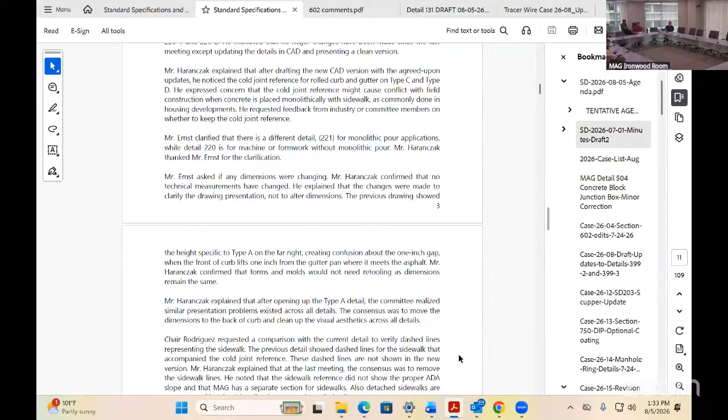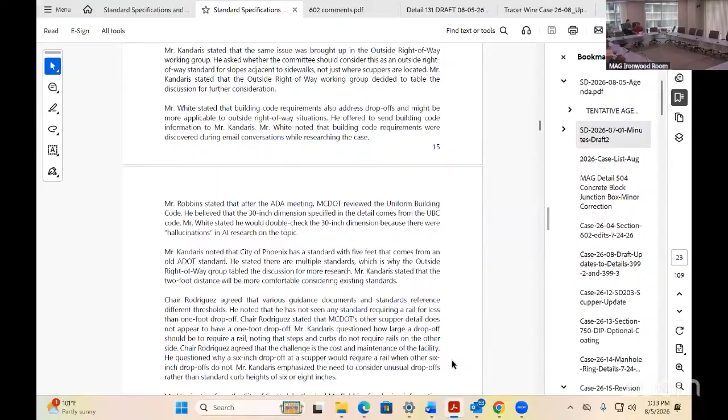As Gordon is panning through the minutes on the screen, does anybody have a comment that they had caught beforehand? Or does anybody have any corrections or any additional notes that we need to mark into the minutes? If not, I'll entertain a motion to approve. Mr. Chair, I'll motion to approve the meeting minutes as written. All right, thank you, Mr. Haranczak. Is there a second? This is Warren. I'll second. Thank you, Warren.

Okay, this is a roll call for the July 1st, 2026 minutes. ADOT, yes. Avondale, Buckeye. Was that a yes? No, I was asking Jim if he's there. Buckeye, yes, thank you. Chandler, yes. El Mirage, yes. Gilbert, yes. Glendale, yes. Goodyear, Maricopa County, yes. Mesa, yes.

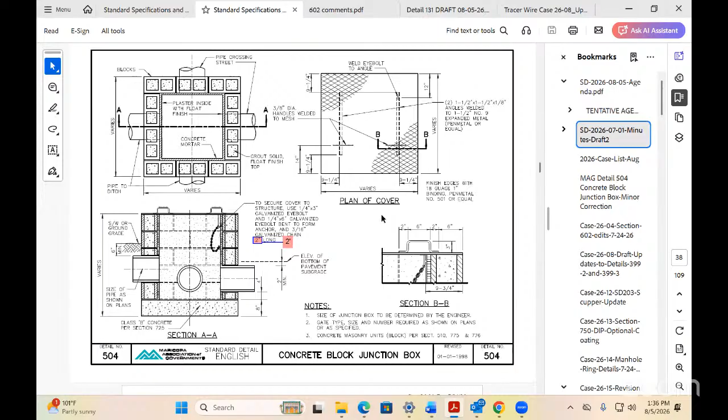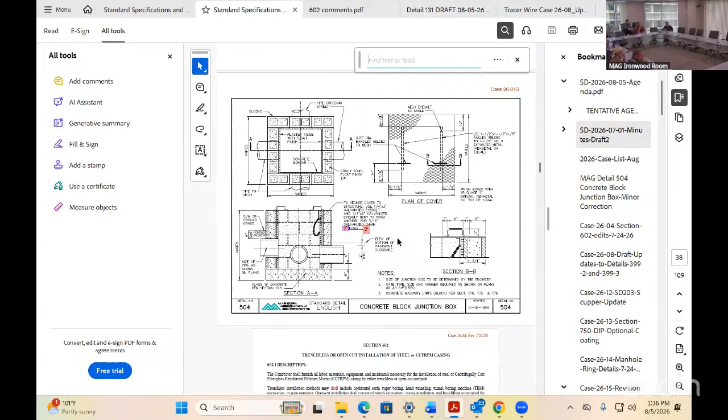Case number 2601, miscellaneous corrections. I don't believe there are any new corrections, actually, or there was one that was brought in at the last minute. So do you want to go over that? Yeah, this one was from, I believe, MCDOT. And it was just changing a typo from a 2-inch long chain to a 2-foot long chain on detail 504. You mind zooming in real quick? That's the lower right. There you go.

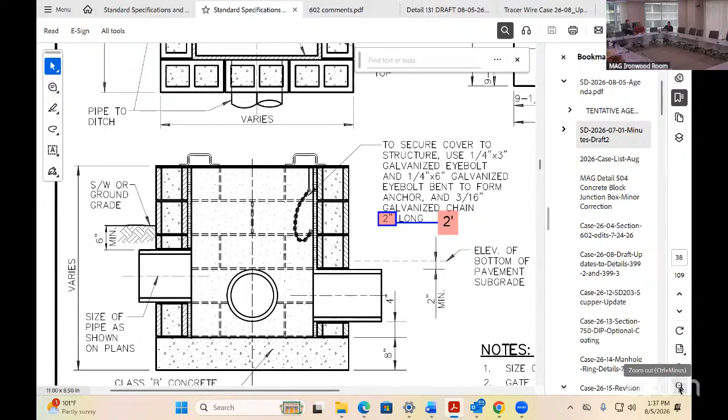Yeah, that's definitely a misprint, Mr. Chair, to have a 2-inch long chain there. I am surprised that it hasn't been brought up. Yeah, good catch on MCDOT's part. Definitely meets the blooper requirements. Yep. Anybody have any other comment on this? If not, it seems like everybody's saying it's a very straightforward change. All right. Does anybody else have a last minute correction to add to this month's meeting?

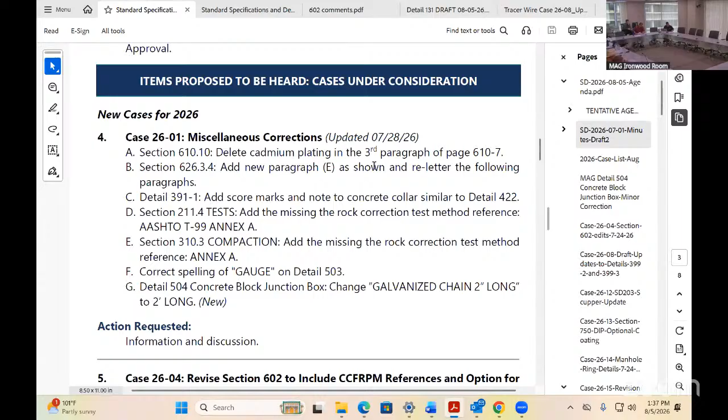No? All right, then we'll move on to the next case, 2604, revision to section 602. Arvid, would you be able to give us an update on this case? I don't know if Arvid was on yet. Mr. Chair, if Arvid's not on, I can provide an update. Thank you, Gene. So based on the last meeting's discussions, the committee members wanted me to go through and look at shall and may. That was Peter's suggestion, great suggestion, Peter. I went through and did some scratch outs and supplied this to be posted for everybody to review.

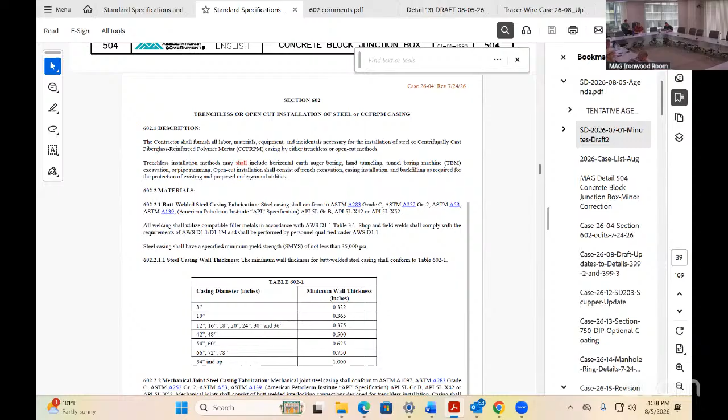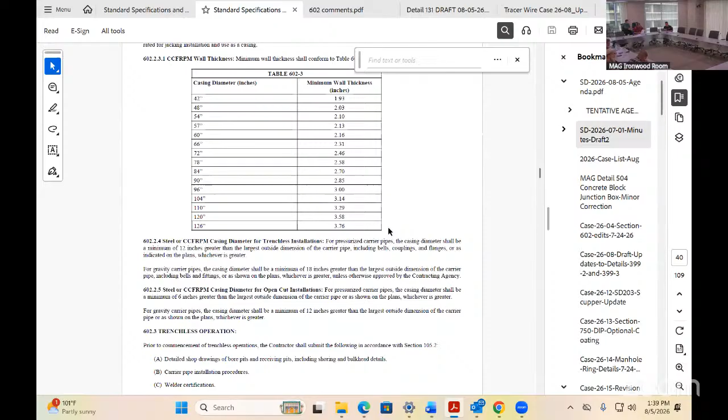I still encourage everybody to review it, but since then, today I received comments from City of Phoenix, MAG Chair Jose, regarding some numbering and pointing out a few other items that need to be looked at. So Arvid and I are going to need a little more time to go through Phoenix's comments, which I greatly appreciate. And also, I realize I have not checked all the ASTMs to verify that they are correct and the links are still there. That's another action item for me. That's all I have, Mr. Chair, if you want to open it up to the committee.

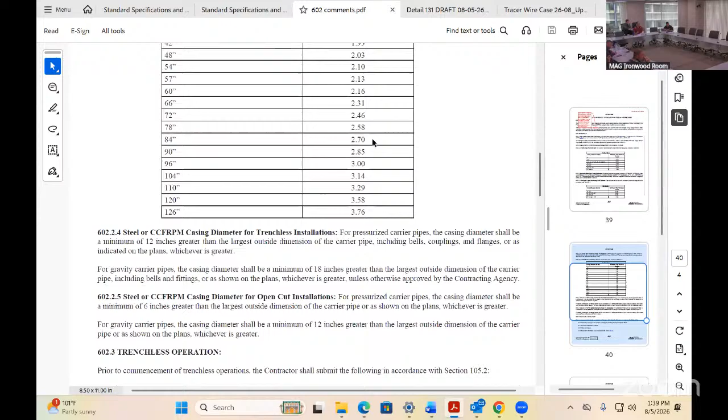Yeah, just for the group's benefit, most of the comments that were made were more on formatting and layout of the specifications. There wasn't really any change to the language that's being used. I think Gene and Arvid have been putting a lot of work into this and it's clean. I think it's just mainly final touches. Has anybody else had a chance to review that, or is there a pending question to ask of Gene since he's been heavily involved in it? Yeah, thank you, Mr. Chair.

If not, what are your feelings, Gene? Since Arvid is not here, is there a way to potentially flush most of the outstanding comments by the next working group, and maybe consider the case for action next? Yeah, I can commit to that. I'll get the revisions.

I'll look through these and make any changes I think are applicable. I'll get a clean-looking version through the working group and get it in front of everybody. I'd like to see it up for action at the next meeting. I need to connect with Arvid because he's got to put eyes on it as well, but I think we can make all that happen.

All right, Mr. Chairman, the next meeting is our last meeting for the year, isn't it? No, I think September is our last meeting for the year, with a potential option for October, correct? Yes, that's correct. Generally, we try to finish in September. Okay, so the hope is we can get everything ready to go by next meeting. Correct, hopefully we're presenting final drafts next meeting.

And other stuff that we don't want to roll over. Based on next meeting, we can assess the overall team's willingness to potentially meet in October or not, depending on what's pending and what's critical. If a case like that were going to go to vote, when would that need to be proposed? This month for next month, or next month for October? Is it proposed a month ahead? Typically, yeah, the item needs to be noted for potential action.

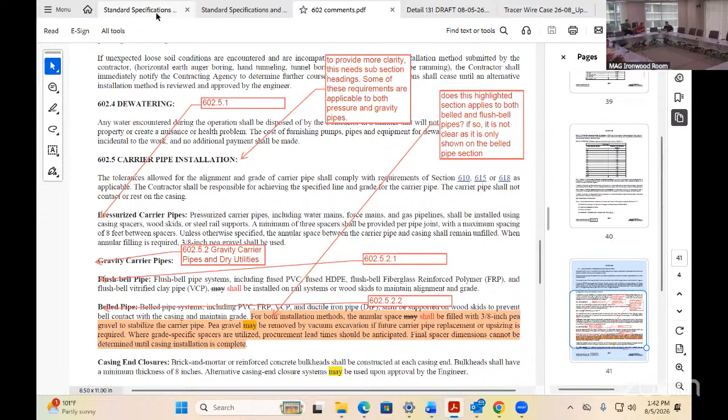Next item on the agenda, case 2607, updating the sign detail 131. Warren, I think you just gave us a fresh version this morning. Would you mind going over that? Yes, thank you. Thanks, Mr. Chair. Thanks, Gordon, for the last-minute submittal. Not a lot of updates here, but on page 1, the additions are the drill holes there in the middle, based on City of Phoenix comments.

I hadn't heard back from Jose whether those drill holes apply all the way down the post, but for now, they're shown just on that top section. I went ahead and applied them to the type C as well, Jose. Yes, I will get you some confirmation from our sign shop on that. Okay. And then a very minor change on the note on the lower right. I just said see detail 131-2 and 3 for additional requirements, since we've added 2 pages. So I think that's it for page 1.

Okay, on page 2, the title remains the same. This page is specific to the type D. However, for that lower right note, I realized that the placement applies to all types of bases, not just the square posts, so there's a slight overlap. The only other changes are in the lower right placement detail. First off is the note where it says 7-foot sign height per MUTCD. That'll pretty much be the standard for right-of-way.

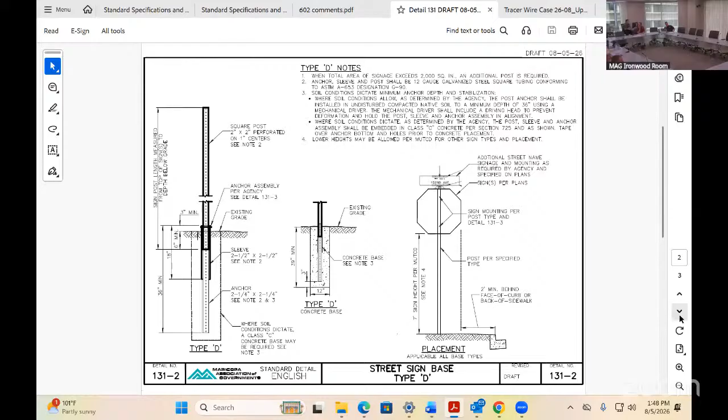Okay. All right. And right now we've got the type D, and if you go to the next page, I just wanted everyone's input on this too. Do we like the type 1, type 2, type 3? Because on a square post, it'll be a type D, and then specifying the anchor assembly, we're gonna say type 1, type 2, or type 3 anchor assembly. Does that seem okay to everyone? Again, those different types match up to the different ways our various agencies mount and anchor the signs. What was the question? I was just making sure, do you like type 1? Okay. And since we've already used type D, now we're gonna have the type that further defines what anchoring and mounting type is going to be on a type D.

I don't know. It could have been option 1, option 2, option 3. Repeating the word type is the only thought I'd throw out to y'all. Maybe as another option, say type D-1, D-2, D-3, so it's understood as a sub option of the type D anchor assembly. Yeah, if you prefer a different way to do that, let me know.

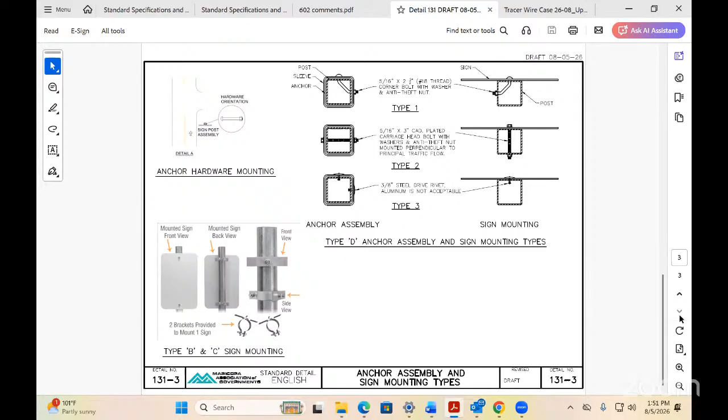Yeah, that was what I was wondering, just some better ideas. So from Jose's, so we'd call it type D-1, D-2, D-3. Yeah. All right, I like that better. Thank you. Perfect. Anything else?

The other thought is obviously it'd be nice to wrap this up this year, but I don't know what's the feeling on how close this is then. I think it's close, but I'll definitely open it up to the other agencies to see if they foresee a need to send it through a round of review internally within your agencies. And obviously the agencies have details out there to use. So if we had to carry this over so we have a good round of comments, that's not the end of the world. Right?

Well, I think we can put it for potential action, right? It's always a potential action. If it's not ready and there's no motions to vote on it, it'll roll over to the next month's meeting. So yeah, Mr. Chair, I'd agree with that. I think if Warren can get those markups churned around pretty quickly and get it in front of the committee for full, complete review, I don't see why we couldn't have it up for potential action at the next meeting. All right, yeah.

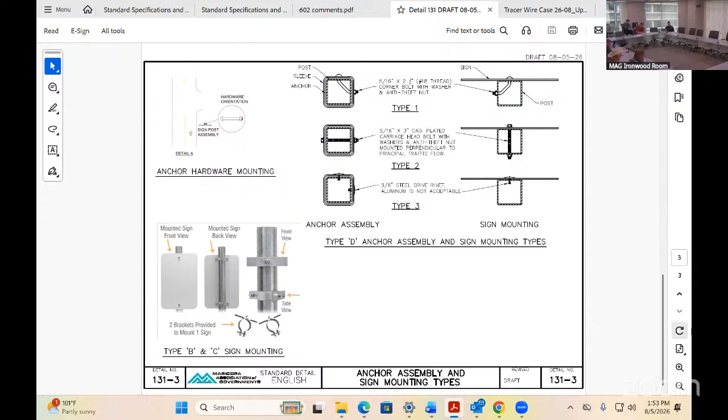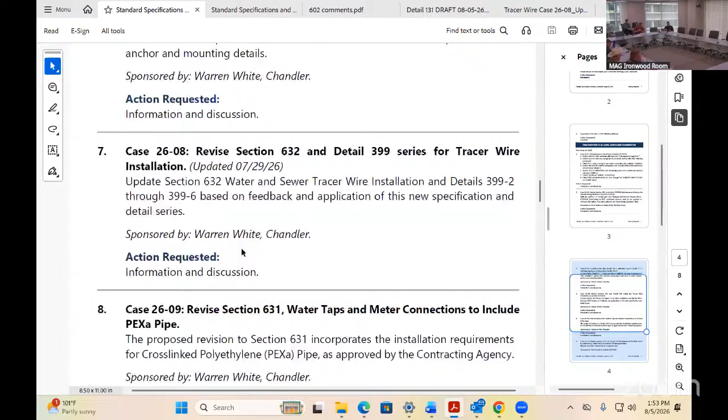We'll move on to case 26-08. I think this is still you, Warren. Revisions to the tracer wire installation specification. Stopped my video too soon. Okay, thank you. All right.

Yes, so we were able to get some industry help on this. And then we had some more efforts getting a CAD person on board. So we do have some updates, and at the working group, Katie had shared one version she'd worked on. However, if this is the latest, Gordon, what was sent supersedes what was shared in the working group. And basically the comments here are a culmination of a lot of things that we've been talking about through the working group this year. So no changes to detail 399-1.

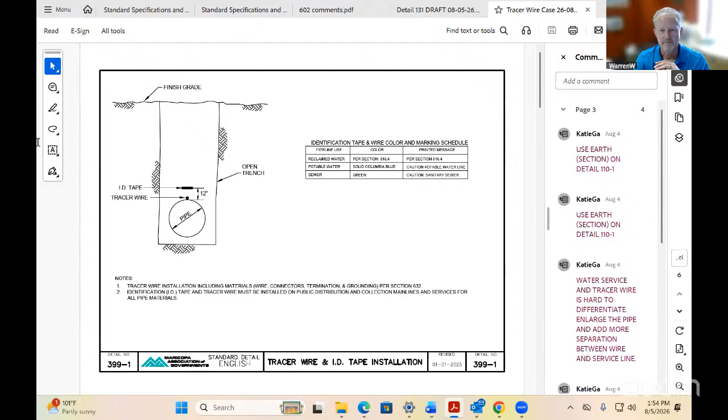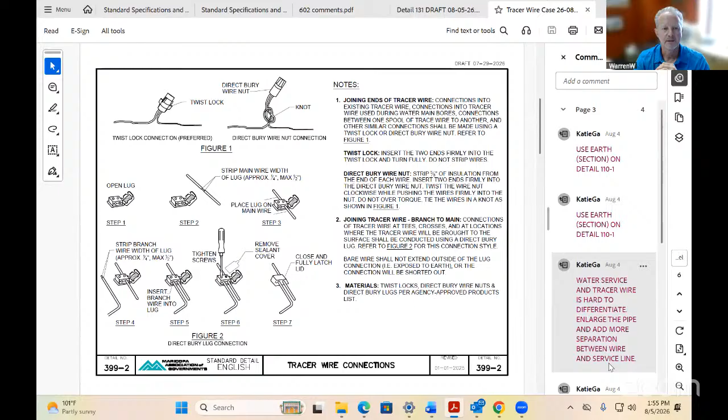On this detail, all the notes have been updated based on the previous packet. Some minor changes in the graphics, where you see the lug connection. There was some stray wire shown, and it came out of the working group to not show that, so the intent is not to have any exposed wire when it's buried. So that's been updated. That's it on that one, per my notes here.

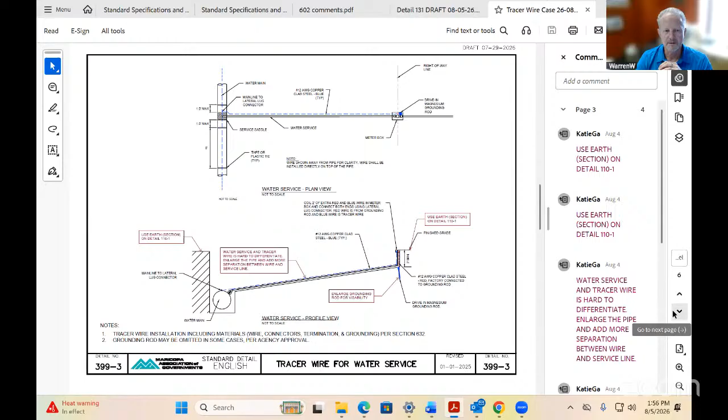And then on this page for the fire hydrant, the notes were modified over on the right, and we caught one thing that came out of the working group discussions. We need to add some additional language about the two terminal access box that's shown on sheet 5. So still some further cleanup there.

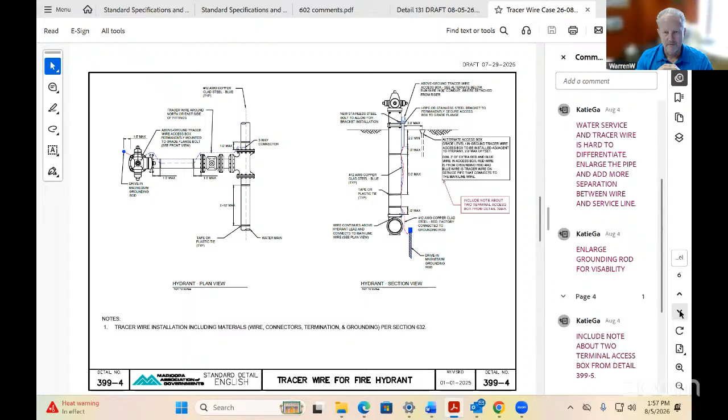And then on page 5, same thing here on the sewer service. The profile is now shown below the plan view. Same need to show the earth symbol, and note number 3 was added. Let's see, I think we had 2 on there. Yeah, 2 on there. The marker ball was on there last year too, but note number 3 was added

that allows for, and again, that matches the language in section 632, that you don't necessarily have to have one on every service, or if there's a conflict. So it's just some language there. I'm reading this, and I think we need some more wordsmithing on that, but that's what we've been talking about in the working group.

And then what's required is that the tracer wire be connected with a buried twist lock connection. So anyway, some similar comments just to make sure the grounding rod needs to be a little larger, and just some clarification for when you're out in the field. So that's it on that one.

And here, I think we changed the name of this to tracer wire termination at sewer manhole, just to clarify what the intent of this detail is. I think that was it. Yep, just the title. So the long-awaited comments are here, so thank you for the patience for us to get this to you. All right. Does anybody have any questions or comments for Warren?

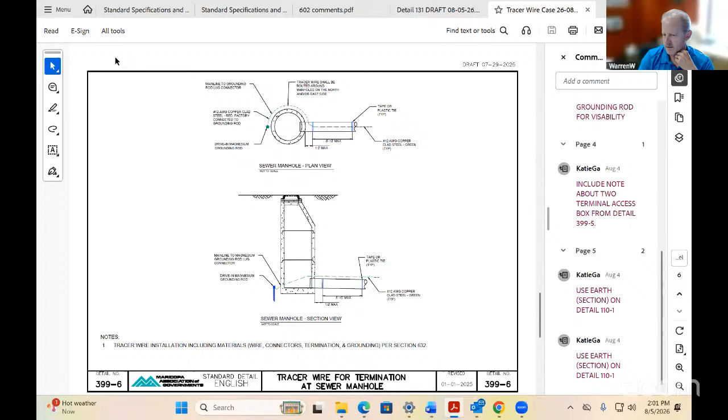And you're absolutely right. Last year I shared this with our fire marshal, but our fire marshal has changed, so maybe their opinion has changed. We did share this with them, because I was thinking the same: are you going to have any issue with something attached to it? But they didn't seem to be concerned with it, but other fire marshals may have some comments. So that's a good comment. Warren, I had the same experience early on when you first introduced this case. I ran it through the fire marshal office, and they had no opposition to it, which shocked me. Yeah.

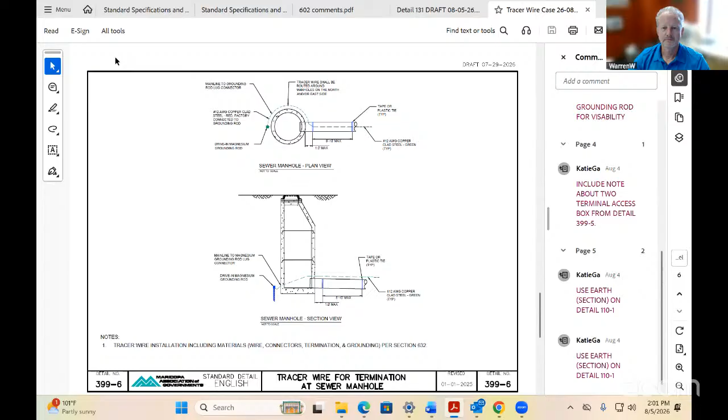That's good. Good points. All right, Warren, I think this one might need a little bit more time to refine, so we'll play it by ear. Okay.

Let's move on to the next case, which is also yours, by the way. 2609. All right, I gotta congratulate you. You're very active in the community.

That's a good thing. Revisions to section 631, the water tap and meter connections specification, to include PEX-A. Right. No changes from June. I haven't received any comments. This is basically the material spec to integrate the cross-linked polyethylene material into this spec.

All right, and I think this is the same version you've shared for, what is that, a couple of months now, right? Yeah, I haven't received any comments on this. What's the working group's feeling on it? I mean, if there hasn't been any new changes or comments, does any agency member need more discussion on this? Yeah, I think we've incorporated the comments from the working group from a few months back in page 1. I see Jim's ready to speak up, but I think we didn't have much feedback on the last working group.

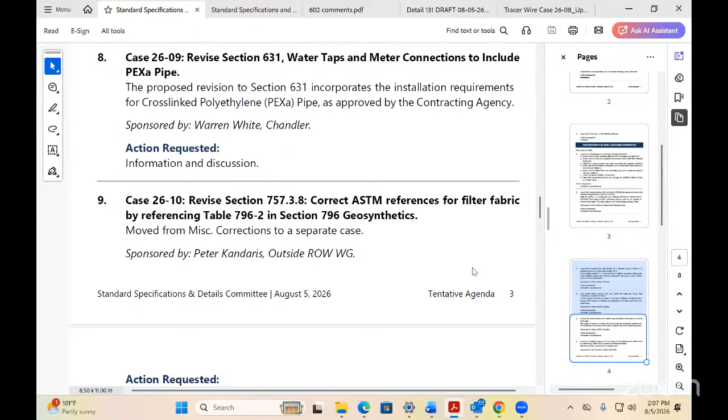Can I make the motion to do it then? Not today, I think it has to be for the next meeting. It's not up for action yet. Okay, we'll just put this up for action, we'll vote next time. Okay, thank you. Next case.

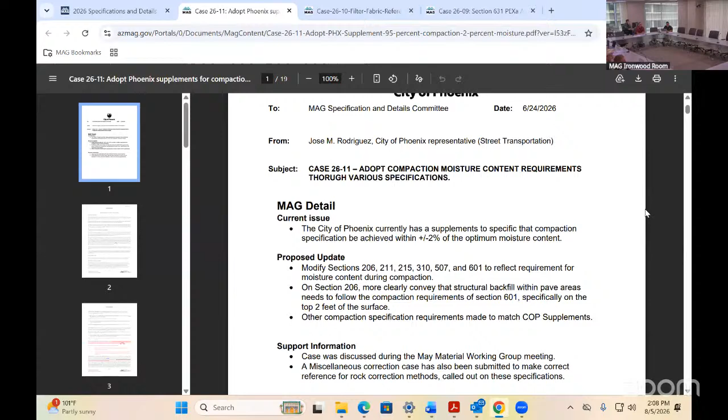Case 26-11, changes to the compaction specifications throughout MAG. This is my case, and I apologize, I meant to prepare something from our last discussion. Gene, I know we've been going back and forth offline on this topic. I was going to prepare a draft, but I think the major comment that I received from you was related to clarifying, when we say compaction within plus or minus 2% of the optimum moisture content, what that optimum moisture content is.

The latest conversation I had with some of the staff back at the lab: throughout MAG, a lot of the compaction specifications are pretty mute in relation to the actual Proctor test method to be used to develop the moisture density curve. A lot of the specifications just call out a percentage specification. They won't tell you whether to use a standard or modified Proctor. And there are cases where we need to rely on a 1 point. I think there's only one section in MAG that bans the use of 1 point, which is aggregate base course construction. Right, it specifically prohibits 1 point for AB.

But with that, we can enhance the language to say be within plus or minus 2% of the optimum moisture content from the moisture density relationship curve used for compaction testing. But I would not want to specify the test method at this point because of that reason. Because if you're making an evaluation of compaction based on 1 point, but we say you have to be plus or minus 2 of the standard Proctor curve, things are not going to jive in the field.

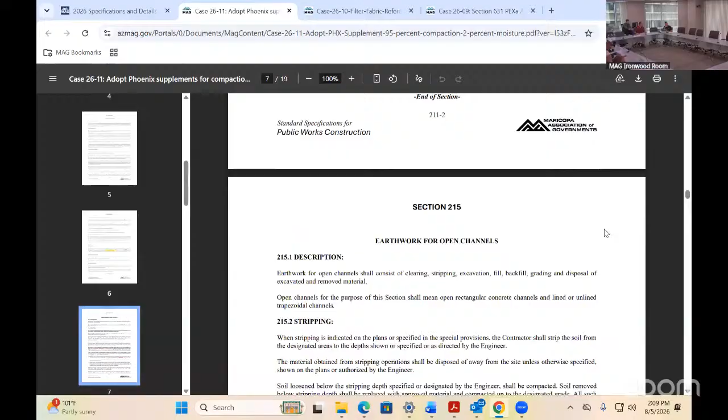And I agree with you. When I first read it, I was not seeing any reference to any kind of test method. So that's what flagged me. The first thing I thought of was plus or minus 2% of what? Yes. It is surprising that we're able to figure it out, and we can take this case and try to start developing that. Mr. Chair, I don't know what the rest of the committee thinks, but I think plus or minus 2% of optimum moisture is clear enough. And precedence has already been set using that in other places.

Like I said, it was just a flag that popped up for me right off the bat, because I was wondering, when we would run a modified Proctor with a heavier hammer, we'd have a little different tolerance on moisture than we would with a standard 698 Proctor. Yes. But I did go through the test method wherever the specs outline the Proctor to be used. It's always a standard Proctor, whether it's a reference to the ASTM version or the AASHTO version. Okay. There's not a reference to the modified Proctor in here.

Mr. Chair, weren't there a couple sections in there that we discussed that would be more appropriate at 90 instead of 95% compaction as well? That is something I need to work on. The intent of the initial case was to mimic whatever we had in our city supplements. So I have to go back and look to see if it's worth changing the compaction requirements to 95. But I don't know if that was something that was discussed at the working group. I don't think we discussed the percent compaction.

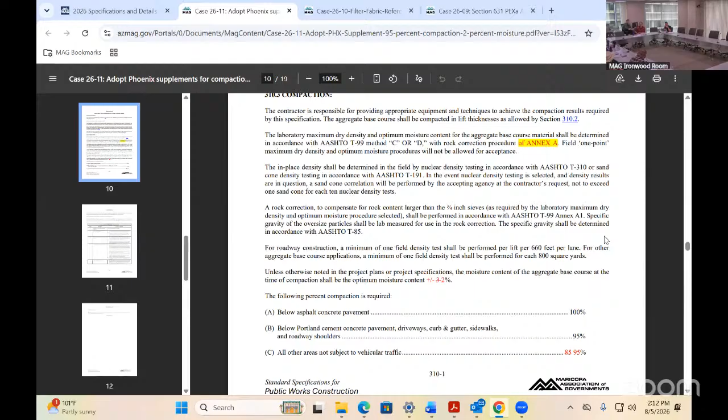Briefly. We did talk about expansive soils, and then there was potentially another application in that cluster where, because it had an optimum moisture, it was changed, but the 90 was changed to 95, and it would have been more appropriate at 90. Okay, so I believe the intent is mainly the inclusion of the moisture content, not necessarily the compaction requirement. So not changing the percent compaction, just changing the moisture. Okay. Yes, so I'll do that as my homework to present a cleaned up case for next meeting, and then distribute this throughout the working group and have members have one more chance to look at it and potentially make it part of a vote at our last meeting.

It does reference 90% several times in earthwork for open channels. Yes, Section 215. In bullet A, it was changed to 95% because this is an area where you're filling in a void. Now, how large that void is that you're filling in could mean that you need a larger compaction.

Couldn't hear that. Oh, that's right. Sorry. We forget that the voice doesn't travel from the members or the audience. This is Rob Duval with the City of Phoenix. Hi, Rob Duval, City of Phoenix.

So in Section 215, earthwork for open channels, in bullet A, there was a reference to 90%, and that was changed to 95% within plus or minus 2% optimum moisture.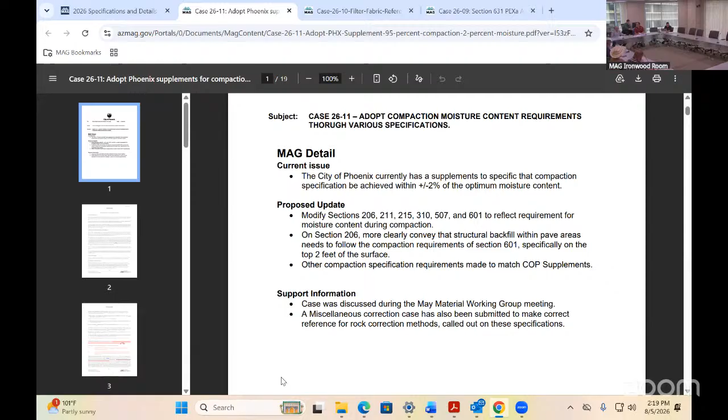But no, that's great feedback, Jim. We can clean that up and then we can definitely go back and clarify the intents on the compaction requirements. And I'll have something before the next working group so we can finalize it. I think we can get it out in the interim as well for comment, and if things line up, then it's a non-issue to try and expedite that as well.

All right. Yeah, you know, this is something we're trying to do in rapid fashion. Yeah, no, we'll definitely share it and then we'll see where the consensus is with the comments. All right. Does anybody else have any other questions or comments on this case? All right, we'll move right along.

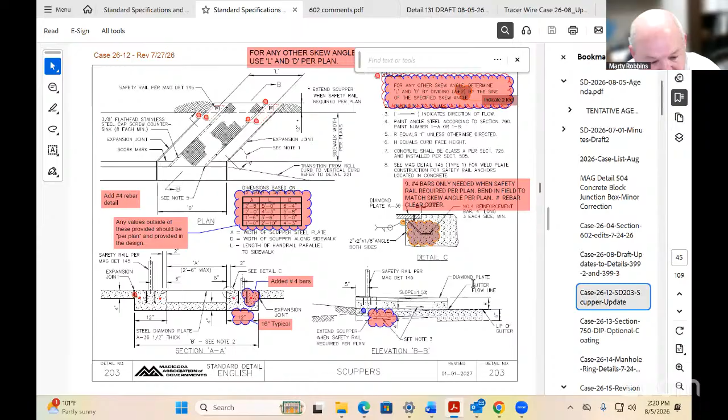Case 26-12, revisions to detail 203. Marty. Yes, Mr. Chairman. We made a few updates since the last time. Yeah, those are the updates I made. This is not the clean one; the clean one's on the next page. But we updated note 1, bringing back one of the original sentences for the angle equals 45 degrees, and that specifies on the plan.

I think you got a typo there, and fixed that. And also say if there's anything other than 45 degrees, that L and D is per plan. So the designer would need to calculate that and put it on the plan. Our construction engineers downstairs had an issue with one of the pieces on it, I don't want to use the word extension piece, but the one where the safety rail goes. So with our structural group, we went with number 4 rebar, and where the safety rail is required, to have that wrapped around that.

And that's basically about it. That's how we updated, I believe, the sheet. So if there's any questions on that. I know there was a discussion last time about the pedestrian guide, about the within 2 feet, that we needed a safety rail within 2 feet. That was recommended.

Our contention, I discussed this with our management, and our thinking is that if we add an additional 2 feet so that we're not within 2 feet, that will be an extension of sidewalk and pedestrians can still walk in that area. So they still wanted to proceed with this. Any comments? Any questions?

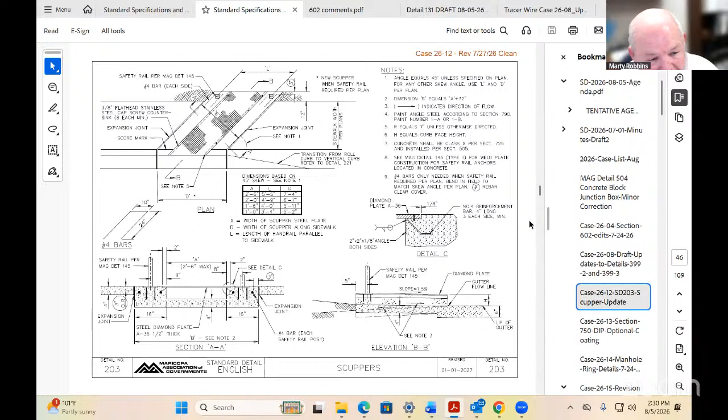So versus saw cutting the original out to get a new plate and everything, and that has to be, you know, to the size dimension given. But yeah, we can. And maybe it doesn't have to be called extension, maybe additional 2-foot behind sidewalk and the safety rail are required only when shown on the plans or required by the plans. Okay. Extend scupper and install safety rail when required per plan. Something along those lines, something a little bit more clear.

Because I think MCDOT's intent is that the information lives in MAG, right? The requirement lives within your roadway design guidelines. But that way it'll jive in there. And I'll let some of the other agency members also comment about the whole thing, whether or not it's required. But I do go with Peter's opinion that ultimately we're probably better off developing a more solid guideline of when safety rail is needed.

This is Warren. I think I like that language. I mean, obviously, we're relying on the engineer. If the engineers put it on the plan, there's probably a reason why it was determined. So if they followed the county's guidelines or some other agency's guidelines that led them that way, or for whatever reason they put it on the plans, then that would work, but at least we have something in MAG that says safety rail and how to do it, but doesn't tell them you have to do it, right?

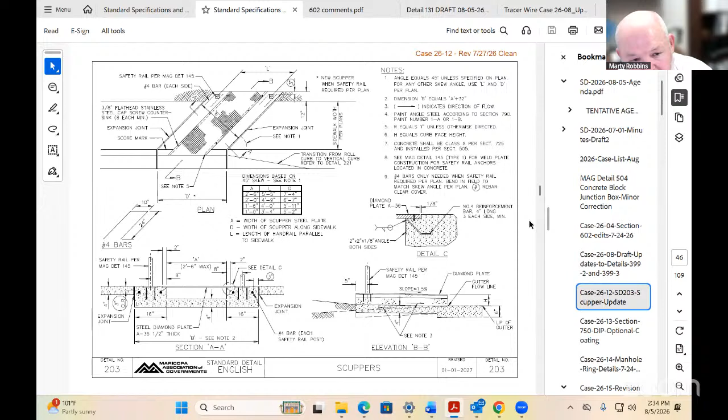I'll see if I can dig up anything, Marty, on whether it's a PROWAG or ADA requirement, or if it's an AASHTO, or where that came from. But even MAG references a 1-inch reveal on the back of the sidewalk for the parkway grade. So it's not something we just pulled out of the air. It came from somewhere. Okay. And as far as we can tell, ADA didn't say anything about this topic. So, but I appreciate that. Yeah, I'll look into it, see what I can track down. If everybody else can look into it too, that would be helpful.

So, Mr. Chairman. Go ahead, Jim. I had a comment. It's more general with naming, not to get into the specifics of the case, but we had an incident with a developer, and it got missed on the plan review, where they referenced this detail 203, and in Avondale we don't ever use these steel scuppers anymore. We consider them old school. We've actually replaced a bunch of them with the concrete ones. Well, the problem is the title just says scupper, so it got referenced, and it should have been a concrete scupper.

And so we had a fight with the contractor, and I said, why are we calling this a scupper? It's confusing with the detail 206. So I'm not advocating to remove this detail just because we don't use it, but I think we need to change the name and maybe say steel plate scupper or clarify it, because some of these design engineers are just picking and choosing and plugging the number in, and if it gets missed and the intent is a concrete scupper, I just think the name needs to be clarified. I propose calling it a steel plate scupper, just something to separate it from the concrete scuppers.

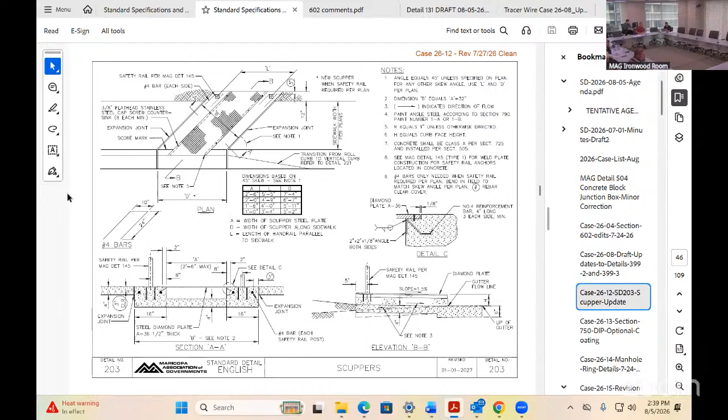I think you got some homework, Marty, maybe a couple more refinements on this. Unfortunately, I don't think we gave you specific language, but if you can try to capture some of the conversation. No, I'll go back and watch the video. I got the time, 2:30 or 2:35. So I can go back and capture that language, make sure I got it right, and address that. And thank you for your feedback.

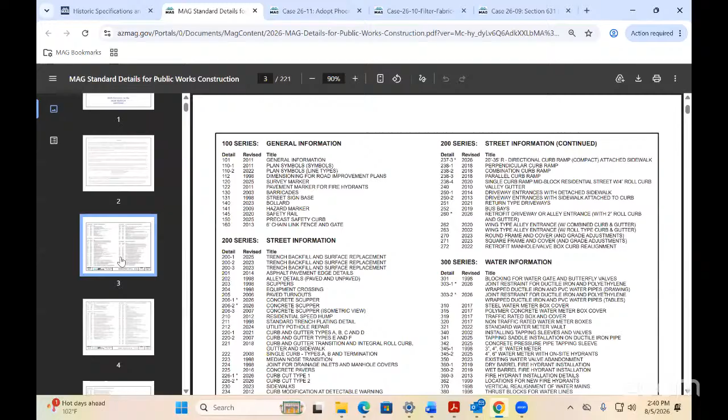All right. I was just gonna say, this is Roy, just real quick on that 206. There is a note, it says a 12-inch offset distance shall be increased to 2'6" for designated bike paths. That's where if we were able to extend it out 2 feet, then we wouldn't even need the handrail. What is that, 206-2? Where are you? 206-1, note number 5. It actually calls out increasing the offset if this is going to be put where there's going to be a bike path.

The bottom, bottom right there. 12-inch offset distance shall be increased to 2'6". But it is not excluding the use of a safety rail. No, what I was saying was per the AASHTO requirement, if I understood what Marty had said earlier, was if it's more than 2 feet, then the safety rail is not required. So if this detail showed a 2-foot extension, we wouldn't need a safety rail.

Let me clarify, so I don't get myself in trouble. Actually, yeah, that's what the guide says. So the guide says if that occurs within 2 feet, but I think MCDOT's thinking is that if it's a walkable surface area, so if you have a 6 foot sidewalk, 5 foot sidewalk, and you extend it 2 feet, you're still making that area a portion of the sidewalk. So it doesn't matter how far you go out if it's a walkable surface. And that's the MCDOT thinking, that it still would apply for the slope and the drop off.

Yeah, Marty, I was going to respond pretty much the same way, as it's still walkable surface. It's still accessible surface. I think that 2-foot extension, in my interpretation, is more designed for the landscape area before we go into a slope. That's what our thinking is. Yeah. Because if I have a 6-foot sidewalk and I do a 2-foot extension, now I just have an 8-foot sidewalk. Yeah, I would agree with that.

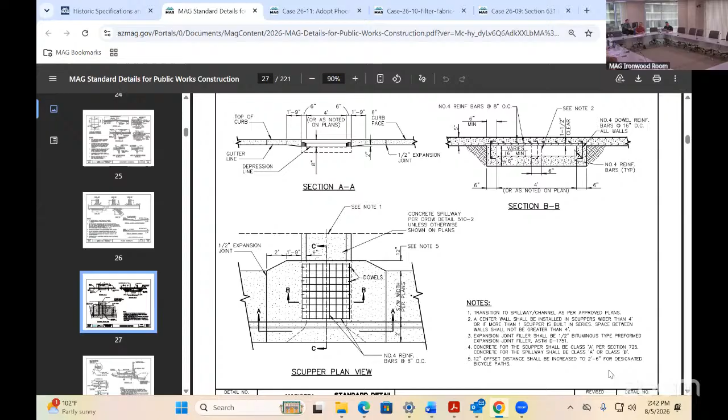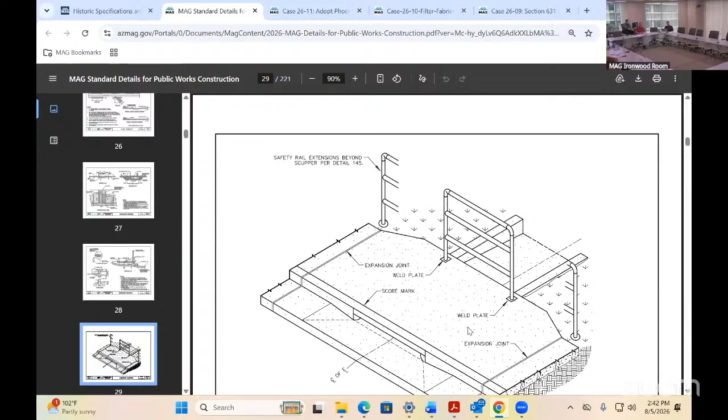I'm not sure; the note probably talks about eliminating the rail when you increase that offset, but I think ultimately it suggests more need to develop a better guideline on the placement of safety rail. Yes, or at least, Mr. Chair, identify where it's coming from, where it's derived. All right, we'll move along, Marty, and hopefully we get more information for the next meeting. Okay, thank you. All right. Sure.

Case 26-13, revisions to section 750. Jim, I think this is your case. Was there any new update from the working group? Yeah, thanks, Mr. Chairman. So we just had a short discussion on the language part of this. We're just again trying to match what the AWWA C-104 says. And so we discussed two approaches: either call out the option or just leave it out, because the option is actually included in C-104. So the working group was leaning towards just leaving it out.

So that's what we wanted to do, just leave it out, and you can see it was struck out there. So it'll simply read now, pipe shall be cement mortar lined in accordance with AWWA C-104. That's what everybody thought might be the easiest way to do this. That way we're in compliance with it, and it cleans it up, makes it current. That was really all we talked about, and I haven't had any other comments either way since then, so open for discussion. Does anybody have any new questions or comments for Jim? This is up for possible action.

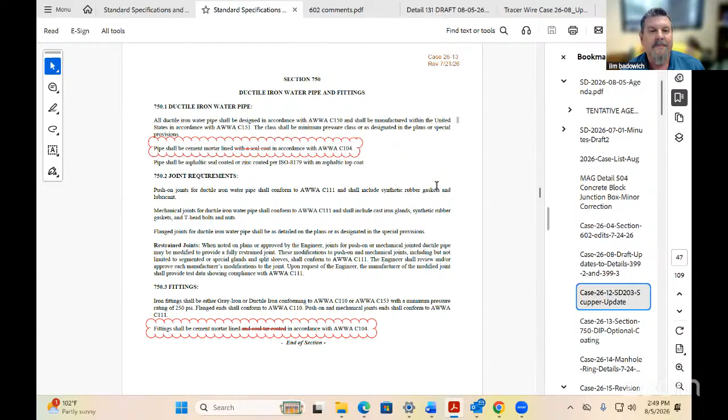All right. With that said, is there an appetite to go for a vote on this particular case? Yeah, Mr. Chair, I'd be in support. I'll motion to move this case to vote. All right. Thank you, Gene. Is there a second? This is Roy. I'll second it. All right. Thank you, Roy. I think we can go into roll call, Carter.

Okay, thank you, Chair. This is case 26-13, revised section 750 ductile iron pipe to make seal coat optional. Let's start with ADOT. Yes. Avondale, yes. Buckeye. Buckeye, not present. Chandler, yes. El Mirage, yes. Florence. Florence not present. Gilbert, yes.

Glendale, yes. Goodyear. Goodyear not present. Maricopa County, yes. Mesa. Mesa, yes. Peoria, yes. Phoenix, yes. Scottsdale, yes. Surprise, yes. Tempe. Tempe not present. Tolleson, and Youngtown, also not present. Motion passes unanimously. All right. Thanks, Mr. Chairman. One last thing to do next month.

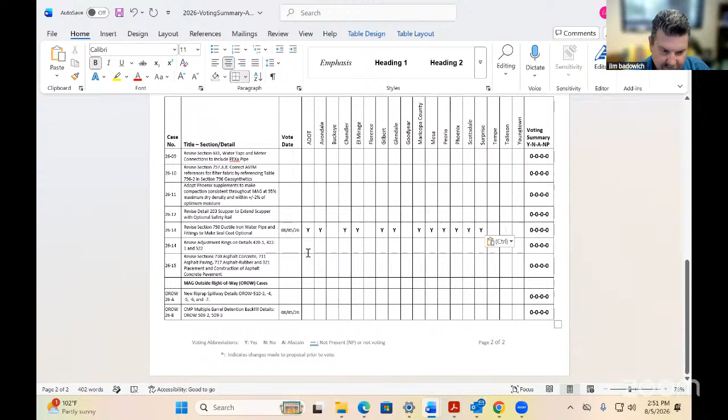Moving on then, case 26-14, revision to adjustment ring details 420, 422, and 522. Jen, would you mind walking us through an update? Yeah, thank you, Mr. Chair. So I had the latest revisions based on some comments from previous meetings and the working group. The latest revisions were done on the 24th of last month. The changes included on 422-1, note 5, just to add a hyphen to the C-478, so it was consistent with detail 522. The cross-section adjustment ring detail, remove the reference to reinforcement, as it's going to be contained in note 5.

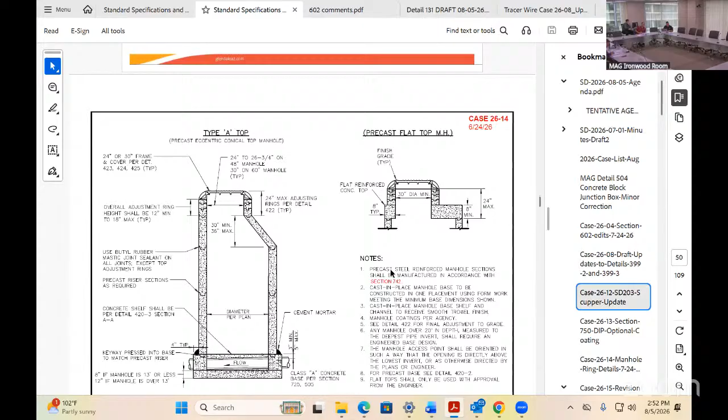On detail 522, note 1, remove the words to be and replace with per. And then remove abbreviations and periods with the ASTM, remove those from A.S.T.M. That was a suggestion from the working group, I believe. And then also replace note 4 with concrete adjustment rings per detail 422-1. Then also on detail 522, eliminate the cross-section reinforced concrete adjustment ring. It's not necessary when we can refer back to 422-1.

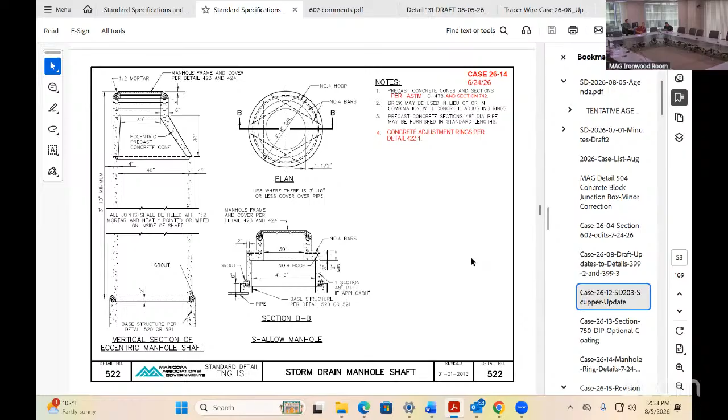I believe that was a comment that Peter had made. Why do we have it in 2 places? And once I looked at it, I said, yeah, I don't know, Peter, why is it in 2 places? Just put it in 1. That way we only have to change 1.

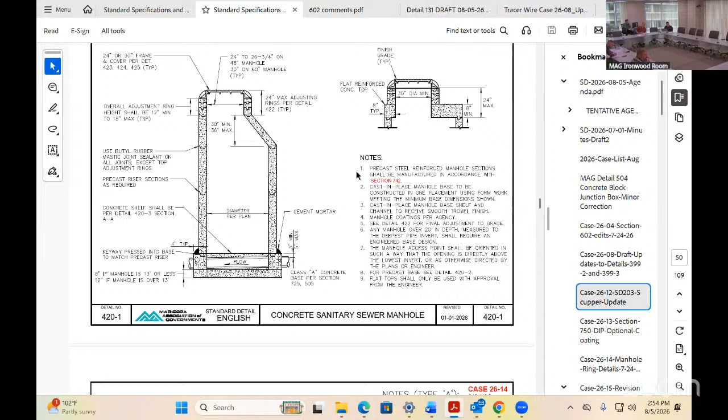That's all I have. I worked with Hayden on this quite a bit. But for this case, I'd like to move it into action for the next meeting. I think it's ready. I don't know if my CAD guy's ready since he's been out on FMLA, but I'll do my best. I can clean it up in Bluebeam to make it look like a clean version with nothing written in red. The red just kind of indicates some of the most recent changes.

And then you can always follow along on the cover sheet that I provide with any of our Glendale cases, so you can follow any historic changes that have been made throughout each meeting. What is it that you were trying to, sorry, Jen, were you done? I was just gonna ask you. What was the intent of the red lines, just to show that they're level and not a weird step to it? Yeah, that's correct.

So the original one was dropped on the inside of that ring. It was dropped like 1.5 inches or something, and nothing's manufactured like that anymore. It's level all the way across. So I just needed to draw it in with the CAD work and make it match the cross section for the adjustment ring detail. That's good, I don't think I ever paid attention to whether or not those were dropped. I drafted that in Bluebeam, which was kind of a challenge, but I'll get my CAD guy to make it look a little better.

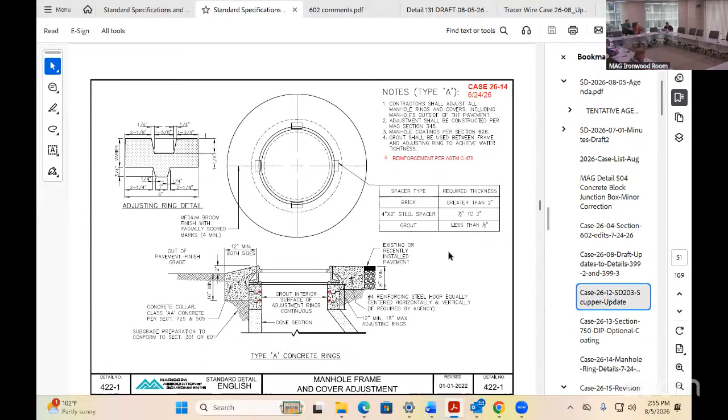Gene, one thing you mentioned was the ASTM reference, adding a hyphen. In the ASTM, I don't think that they use hyphens. So rather than adding it there, I think you should take it out wherever it was showing the hyphen in a different one. Okay. For this case, I've seen it in other places with MAG, but I appreciate you bringing that up. If we're going to pull it out, I'll do it on 422-1, note 5.

It was originally right there. That was an original hyphen. So I'll correct that, and then I will revise my added one and pull out the hyphen there if that's what the committee prefers, or that's what we see consistently. Yeah, when you go to the ASTM Compass website, I think that's the case. There is no hyphen when you search for those test methods. Right. There is a hyphen on AASHTO test methods for some reason, but there's only so much the MAG committee can do.

So does anybody else have a question for Gene? If not, thanks for the update, Gene, and we're definitely looking forward to potential action next month. And Mr. Chair, to sum it up, you are correct. The committee is correct. There is no hyphen on the Compass on ASTM. I just verified. Thank you. Thank you for that live feedback.

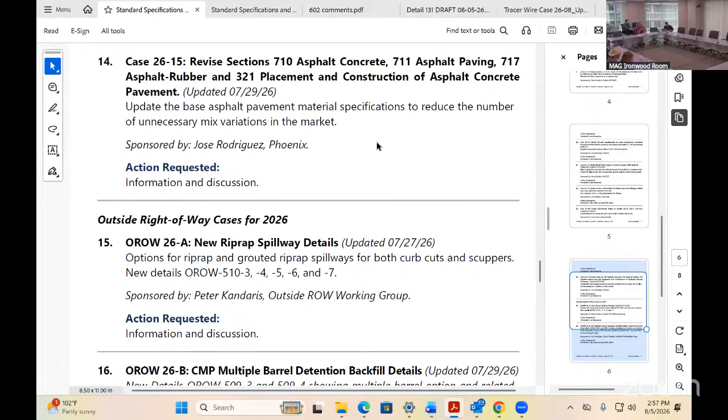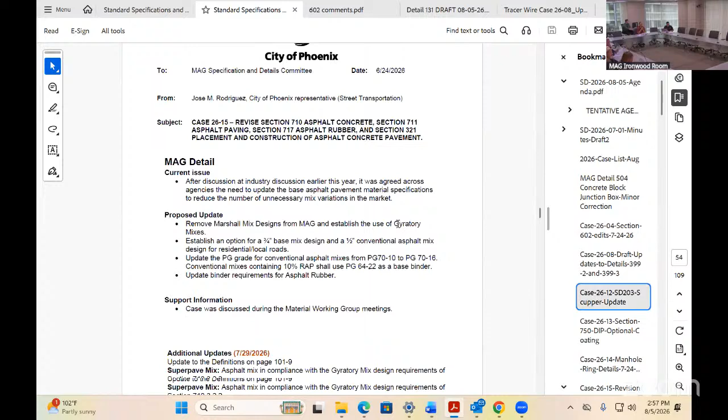Right, we'll move on to case 26-15, revisions to multiple asphalt materials and construction specifications. In the packet, I've included the most recent changes and red line comments and answers, so hopefully it's easier to see the changes from the previous meeting. This was just an additional review after the first draft was provided. Since then, I can share that the current draft in the packet has been reviewed by MCDOT. So thank you, Marty, for connecting us with their lab.

They didn't provide any material changes to the specification. I think they show agreement with most of the changes shown in here. And I believe this was also discussed at a recent EVAC meeting as well, where they didn't share any concerns with the changes being proposed either. So I'm not sure if there's anybody out there that has or is planning on providing any comments.

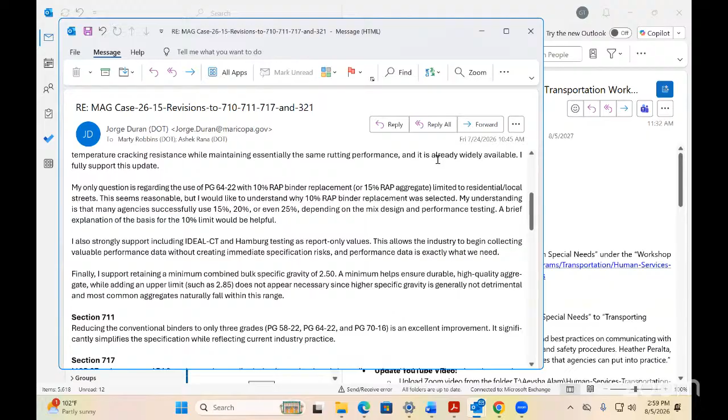For the next meeting for sure, I'll have a cleaned up version of all the comments and anything that comes up in the next couple of weeks. But if there's nothing else, we are shooting for hopefully approving this case this year. Hey, Jose, this is Warren. I've reached out internally and our folks have no comments. They're still in favor. Haven't heard from everyone, but that's my understanding.

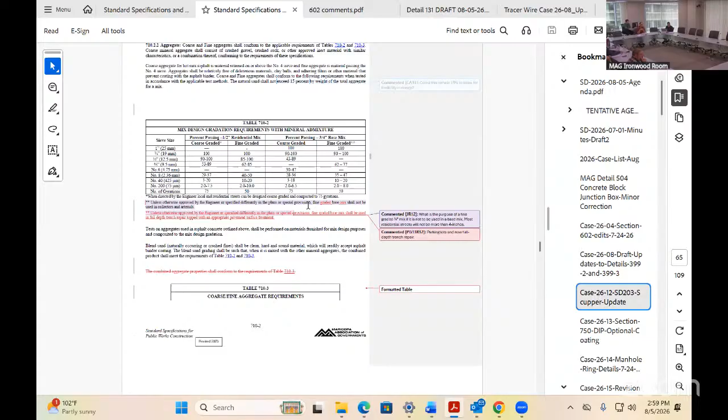Okay, no, thanks for that feedback. Yeah, I think materials wise, I can share that there's been a lot of discussion at the working group level, right? I think everybody is in agreement that this is an improvement to the overall general specifications. The only thing I will flag up for the people that are not materials related is just this particular specification now has the requirement that top surface materials are going to be polymer based asphalt concrete for collectors and arterials. That's probably the most significant change outside of any materials improvement.

So, I believe there is still language in there that if a municipality wanted to specify one of the other applications, they could, but generally speaking. Okay. Yes. Thanks for that clarification. Yeah.

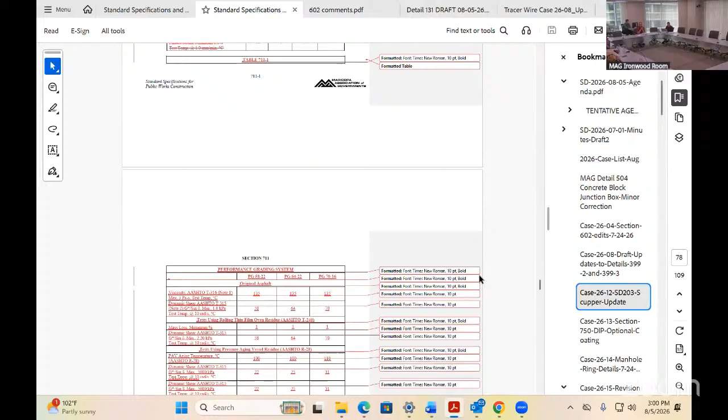And I will share the comment. There's still a modification here to the old rubber specifications. It's our understanding that there's at least one agency out there that uses crumb rubber as a base or as a paving material. That's why that's being left in there. It is extremely rare, but it does happen. So I can't comment as to whether we should remove it or not, but it does not happen very

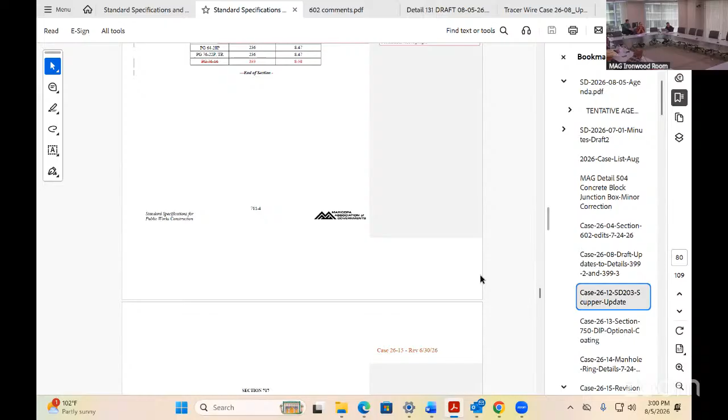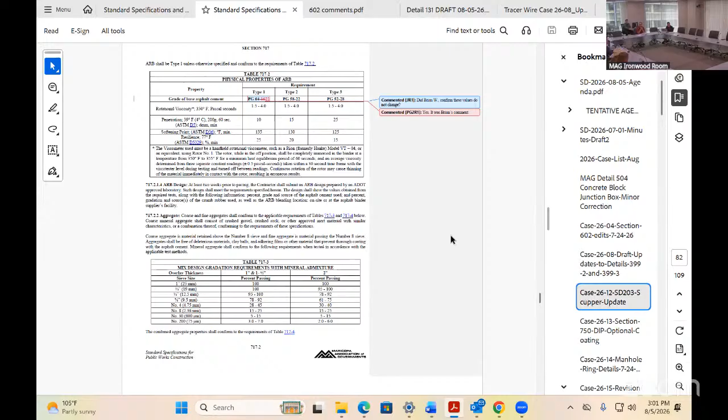often. That is correct. Yes, I think at one point we should consider retiring that specification because it inadvertently gets published. It does, and the use of the nomenclature RAC, rubberized asphalt concrete, can be confusing as to what technology is used there, whether that's a wet process rubber or what we would call a terminal blend rubber. Correct, yes. And the people that truly know the difference then get confused what the intent is. So that's mainly the update. Does anybody have any comment or question on this case?

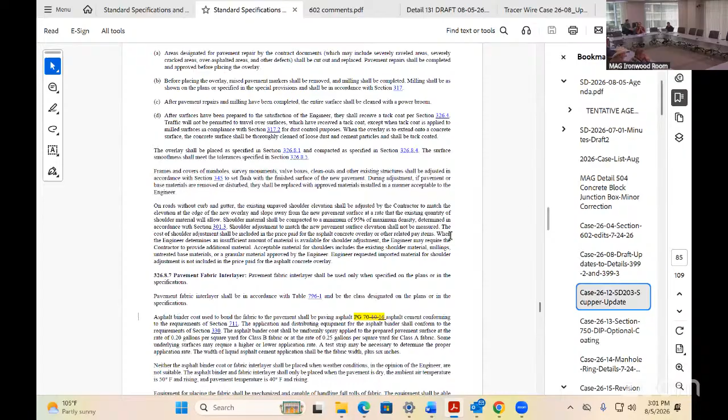Mr. Chair, yes. I just want to note that there was a meeting with EVAC on the pavement cases. And there were a few attendees of that, a lot of people from Mesa. We went through it, and Mesa is strongly supporting this. Obviously, we have a pavement manager that's been involved in working on this. We're hoping to minimize the differences and amendments that we have as this case goes forward.

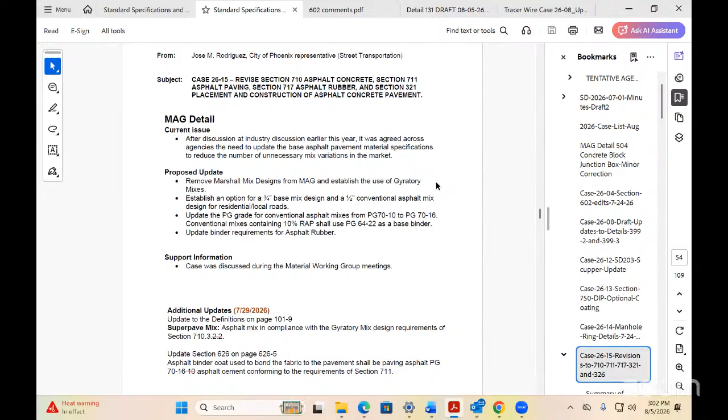We did send out some additional information to the EVAC committee members and just wanted to let everyone know that this was something we're looking at very strongly and are supporting. All right. Thank you, Ryan, for that effort and that extra coordination. Yes, I think my goal is for the next meeting, or probably before that, for the materials working group, we have a cleaned up version of this. And then let that be the final review, and hopefully from there, present the final version that we can put out for action.

So this case, Mr. Chair, will go up for action next meeting? No, in September. Okay. That would be August. October. All right. Then let's put it up for action. Yeah, correct. If ultimately there's still comments, then they'll potentially have to roll over. All right. Anything else? If not, then we'll move on to the out of right of way cases, Peter.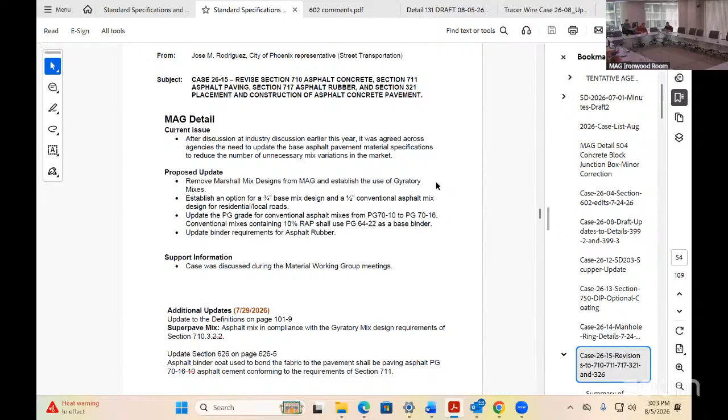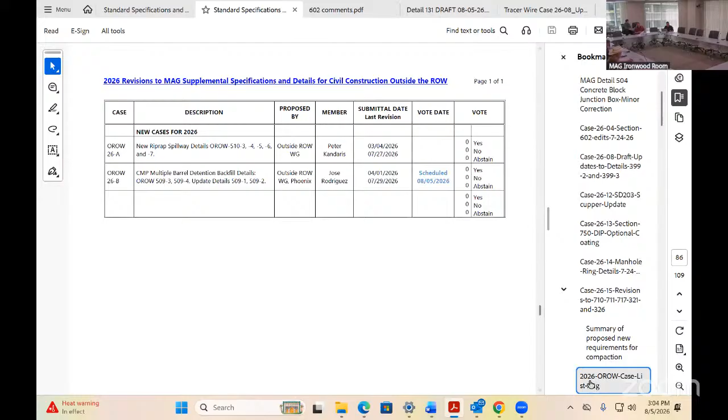The first one, 26-A, new spillway details. Thank you, Mr. Chairman. So in the outside right-of-way meeting, you'll see first in the packet, there is a revised version with language change. The proposed modification from what was discussed last meeting in 510-3 is the only redlined one we have on there. Just as a note, we have removed any reference toward changes to section 220. That will be discussed at a later date, so this is based on whatever is in existing 220. And that I think resolves some of the issues that were coming up.

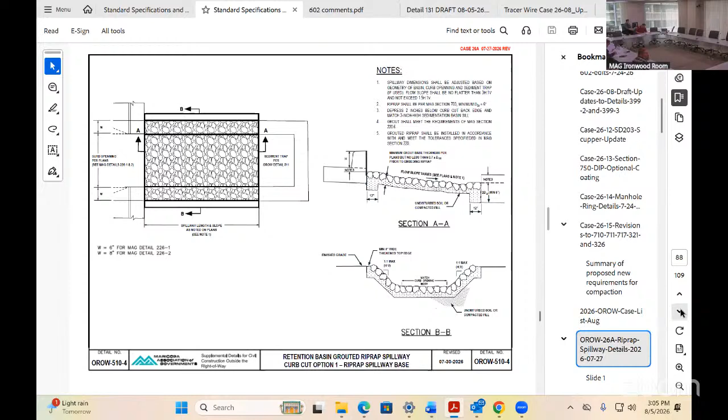The only proposed modification shown on here is the change that was requested that we get rid of the 2.5 to 1 slope and just have it a straight change from 3 to 1 to 2 to 1, because it was challenging from a measuring perspective. And so we did that. That was the only comment we had on any of the cases. The remainder simply reference section 220. Whatever the placement method is, it is for grouted riprap, and we kept it clean that way. Now, we did have one more comment that's not shown on these changes that came up during the meeting.

And since this had already been issued because we had a late meeting, the county proposed that since these are not just for retention basins, and it was agreed upon by many members attending the working group, that we should probably not be calling any of these retention basin spillways. These are really drainage spillways. That also ties to the prior cases that we had last year for the concrete ones for curb cuts and for scuppers. So one thing we would like to add to this case is to change the titles on all these to say, for example, on the one that's up there, grouted riprap drainage spillway, because they're used in multiple applications. And again, we didn't have a chance to get that in there.

So we'd get rid of the words retention basin on everything, and we would add the word drainage where appropriate. For most of these, it would be either riprap drainage spillway or grouted riprap drainage spillway. And then on the prior ones, 510-1 and 510-2, we get rid of retention and just replace with drainage. So it's a drainage spillway. Again, these are open conveyances that could be used for multiple applications. So that seemed to be a reasonable thing. That'd be the only change we're proposing beyond what was marked up in red. Otherwise, I'm open for any questions. We hadn't received any other comments other than make sure we don't change 220 at this time.

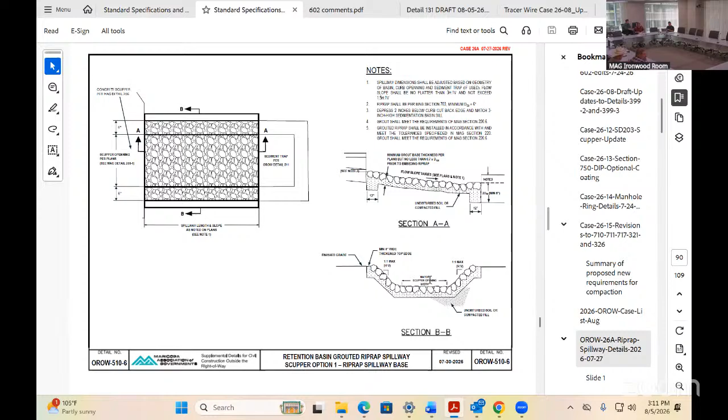If not, we'll move along to case number 26-B, multiple barrel detention backfill details for corrugated metal pipe. Just a brief update to everybody. The current version shown in the packet was provided. The red lines for this were provided last time. This is just the final version. The last change we did on this had to do with the notes related to the edge of the trench.

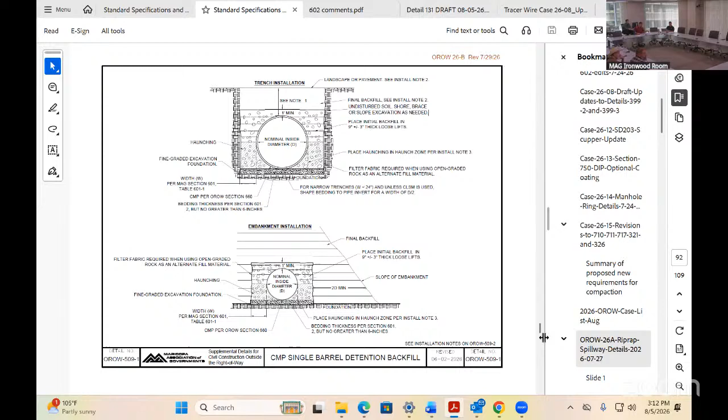Just to be more inclusive, that edge of the trench can be a slope back trench, not necessarily just a vertical trench with shoring. Outside of that, there haven't been any other new changes or revisions. And I think at the working group level, everybody's comfortable with the current version as it is. This is up for potential action. So I'm not sure if anybody else has any other comments or if we're good with entertaining a vote.

I'd rather not motion myself, being that it's my case and I'm the chair. So if there's support out there to move forward with the vote on this one. Mr. Chair, I would motion to vote on this case. Thank you, Gene. Is that a motion to approve? What was that? I said, is that a motion to approve? Motion to vote. So approve, yeah. Okay, I'll second that. All right. Thank you, Ryan.

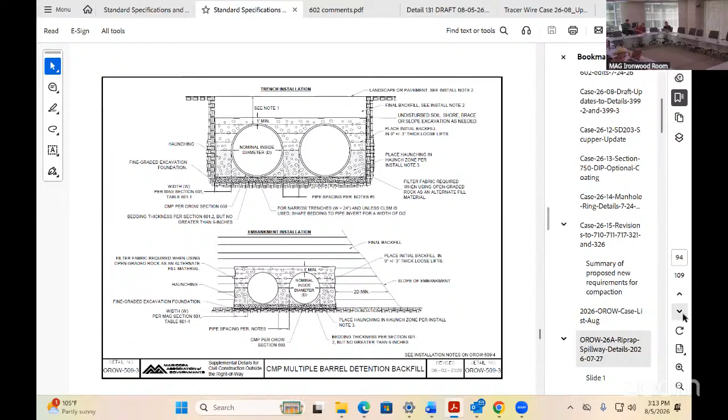Okay, this is the outside right-of-way case 26B, the CMP single and multiple barrel detention tank backfill details. ADOT, yes. Avondale, yes. Buckeye. Chandler, yes. El Mirage, yes. Florence. Gilbert, yes. Glendale, yes. Goodyear. Maricopa County, yes. Mesa, yes. Phoenix, yes.

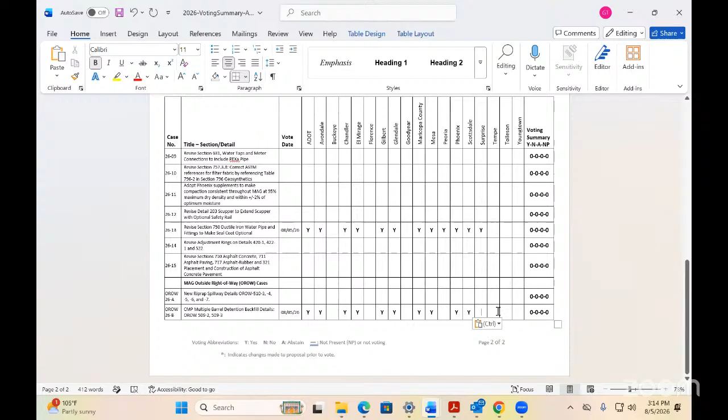Oh, I'm sorry, I skipped Peoria. Peoria, Dan, did you say yes? Hi, Dan, are you still there? Scottsdale, yes. Surprise, yes. Tempe, Tolleson, and Youngtown are not present. So the motion passes. Thank you, everybody.

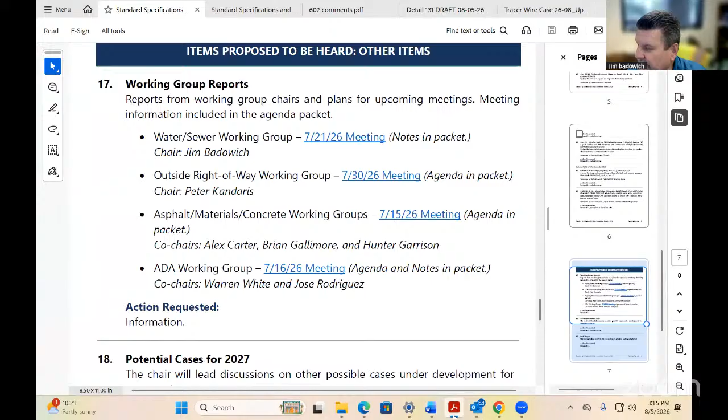All right, we'll move on to the working group reports, starting with the water and sewer working group. Jim, can you give us an update? Yeah, thank you, Mr. Chairman. So we met on July 21st. I'll just keep it short. We basically just wrapped up some of the cases we talked about already. One thing we had a short discussion on is some cases for next year. Some cases you might see next year are the FRP pressure pipe, so large diameter fiberglass reinforced pipe for use with water at higher pressures.

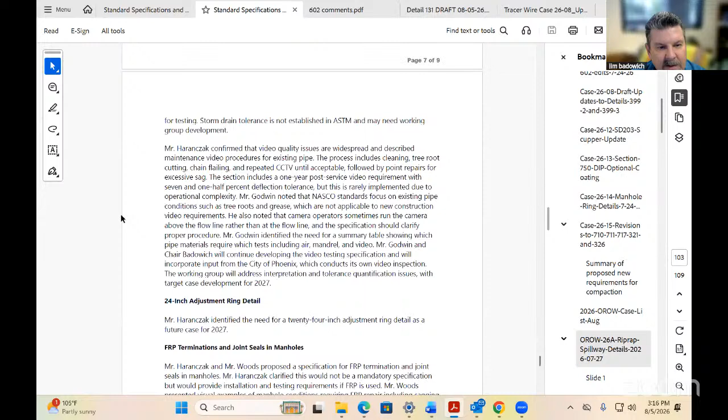We're working on standardizing some sewer video testing. That'll be in 611. What else did we talk about? Also, probably one of my cases will be bringing forth some large manholes for large diameter pipe. MAG doesn't really have a good detail for the larger diameters, like 24 and larger. Adding new manholes on existing lines. So we're trying to create a case for that. That was really about it.

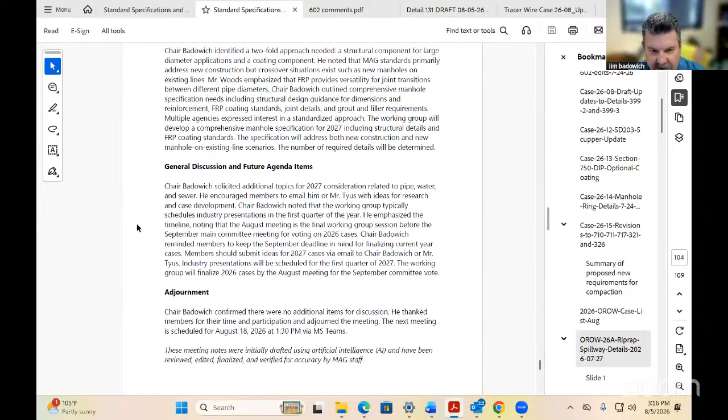We're going to meet on August 18th. This will probably be our last meeting of the year. And I know we've got a couple of things we want to wrap up. So thanks to everybody working on cases, Warren and Arvid. Hopefully we get these wrapped up so we can get them voted on next month. That's going to be our goal at the next meeting. All right. Thank you, Jim. Moving right along to outside right-of-way.

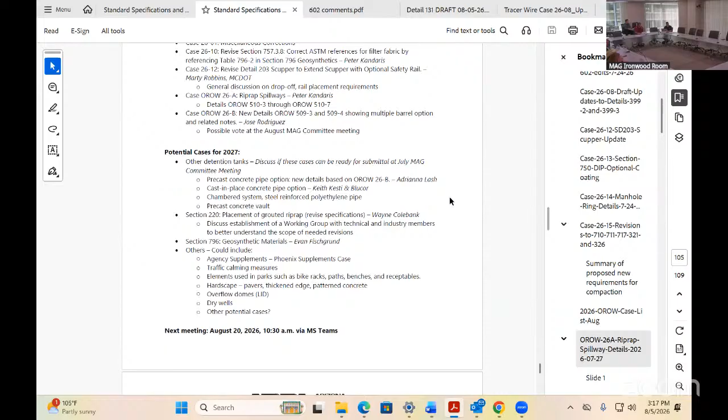Peter? Thank you, Mr. Chairman. I think we've discussed a lot of what we talked about in terms of the existing MAG cases already. So I'm going to jump to what we were talking about as potential cases for next year. One was, because we now have this model for detention tanks, expanding into different types of detention tanks beyond the CMPs. So there's active work on the precast concrete pipe option.

That should be ready, I think, easily by January to present to the committee. Cast in place pipe option, that's going to be looked at, see if they could be modified now. We had some existing work on that. Focus again on the construction installation as opposed to the entrance details and those kinds of things, get those modified. And then we had a discussion with industry on the precast or pre-made types of ones, the poly, the plastic, if you want to call it, for anything else.

Types, and industry is going to take that on, I think, as a challenge, try to see if they can get those. So our goal next year is then to introduce the other types of detention tanks, so we've got the full menu of options available. With that, though, there's also the discussion on having a new detail that would be applicable toward all of the tanks, or at least most of them, for the riser and the cover, the drain, actually the top stuff that goes into it, as opposed to trying to use the existing concrete manhole connection system in MAG.

So I think that's the other aspect. We're going to try to make this a bit more comprehensive next year and get all the pieces put together for detention systems. We didn't have much discussion on Section 220 other than saying this is going to have to be a separate working group. We're going to get together. We've got some names of people. During the latter part of the year, we'll try to get that up and running to where we can get people into a discussion and see if, how, and where 220 could be revised.

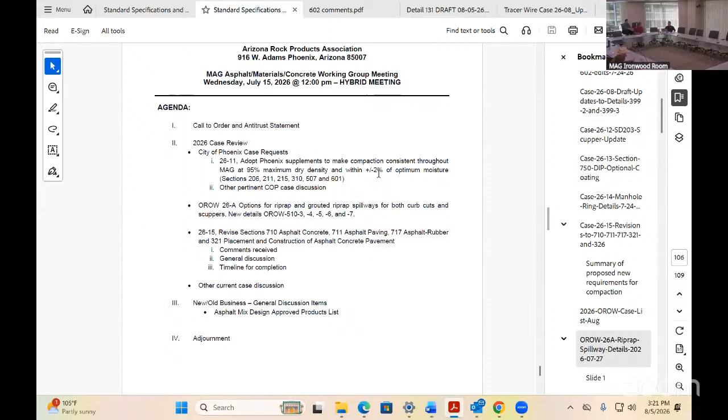And I think last, ADA working group, Warren. Yeah, thanks, Jose. So yeah, we have a little summary of the ADA from the last meeting. If you wouldn't mind going back up to the top there. So, thanks, Gordon.

So yeah, one of the topics, and I haven't been able to get back to, is find out the results from the July meeting for the ADA symposium. Something we can share maybe at the next meeting from the breakout sessions for PROWAG, to see if there was anything shared in terms of status or any other new information shared. So that's on my list to do for the next meeting. But for the most part, the discussion from this meeting was parallel to what we've already talked about. The scupper detail, street sign detail, things like that.

Still working on some other existing details that might be future cases for next year. The on-street parking detail, once we have the sign detail, I'll shift back to working on that. Also, similarly, the crosswalk detail, had a fairly close draft on that, so that might be a case for next year.

The isometric view, still looking to refine that and to get a little more industry support. We've had some support, just have to probably give them more clear direction and get them back on board. But that would be an additional page for the directional detail series, is what we're thinking. So that's probably going to be something next year if we're going to continue to do that.